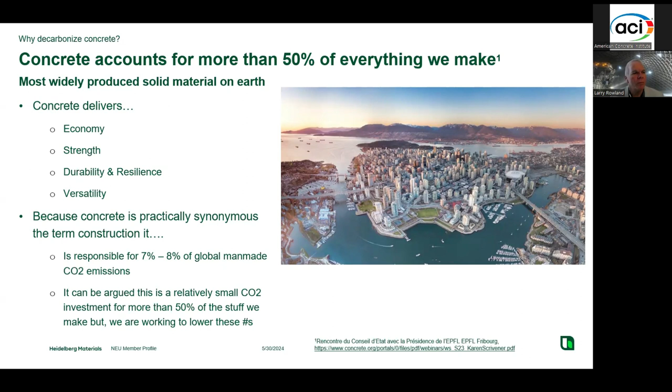Because it is the most widely used material on Earth after water, it has a significant environmental footprint. Specifically, the thing that people are focused on a great deal now is our carbon emissions. The concrete industry is responsible for 7 to 8% of all man-made CO2 emissions. That is perhaps considered a pretty good trade-off for the amount of concrete that we consume on Earth, but it is a fairly significant number. So we want to improve that and reduce it as much as we possibly can.

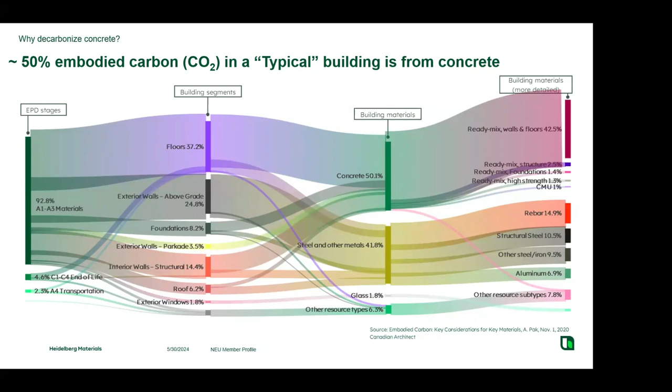Here, the concrete in this example is right about 50% of all the carbon flows, or all the embodied carbon within this building. Steel, glass, some of these other materials are there as well. But you can see the embodied carbon for a building can be quite substantial when it comes to the carbon emissions associated with concrete. And so that is very much a center focus for the design industry, for the building materials industry, and that is very much why we're taking this so seriously, and why we're working very hard to decarbonize concrete. So it's important that everybody gets on the same page of where those embodied emissions come from.

The cement binders that we use will account for 85% plus. Typically, in this example, we've got almost 88% of all the carbon emissions associated with this particular concrete mixture come from the cement binders.

The aggregate, as you see, is about 5% or less. The CO2 associated with processing, harvesting, and getting those aggregates and delivering them to your ready-mix plant are still only about 5%. Likewise, the logistics to deliver the concrete from a ready-mix plant to a project site is also typically below 5%. And then, of course, there's power, and there's other materials that we're putting in our mixes.

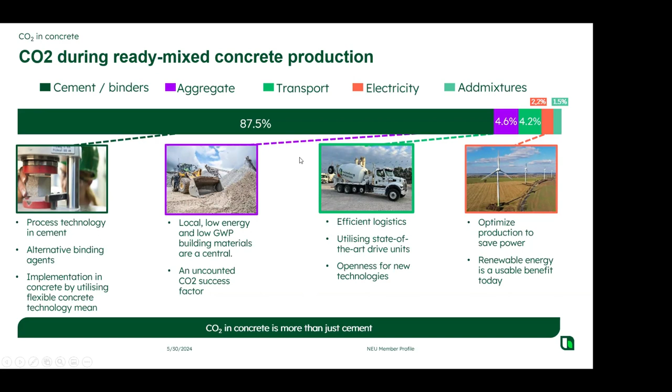So we're zeroing in on the cement, on the binders, because they play such an important role in the embodied carbon for concrete. The industry as a whole recognizes that large piece that we play in concrete.

And so the Portland Cement Association developed its roadmap to carbon neutrality. Heidelberg Materials was a part of this. We're an active industry member, and we worked together to help create this roadmap so that we can plan a way to reduce our carbon and get to carbon neutrality.

The big 5 things that we're looking at are cement clinker, the finished cement that's supplied to projects; concrete, of course, the material that everyone typically uses and associates with our industry; construction, which is certainly a big piece of how we construct our buildings, and will affect the carbon footprint for that project; and then carbonation, which is a naturally occurring uptake of carbon that concrete does all the time.

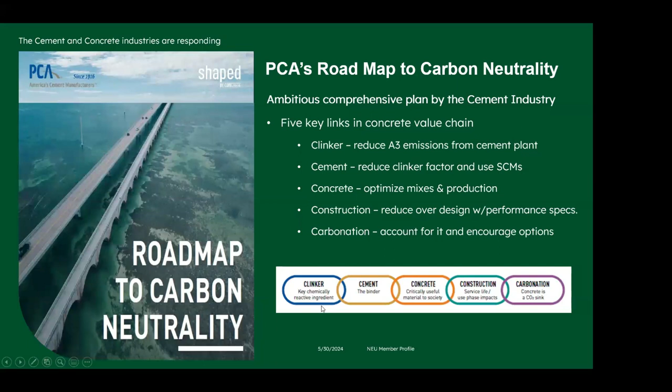Likewise, the European CEMBUREAU, which is the European Cement Association, has a very similar structure, a very similar set of goals. They actually just recently this month published their 5-year update to their carbon neutrality roadmap. They have essentially the same 5 key levers. And so you see the consistency here of everyone recognizing what it is we need to do to reduce our carbon footprint.

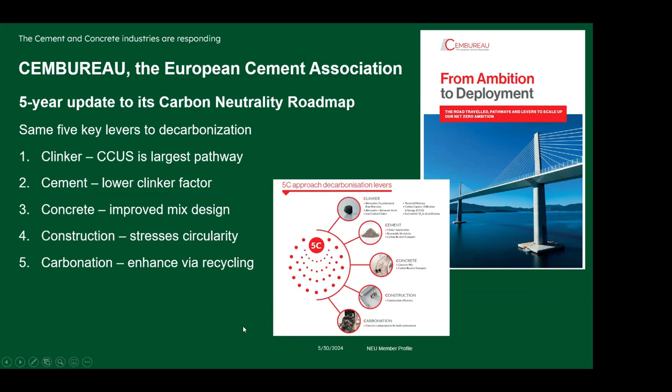With clinker, carbon capture, utilization, and storage is featured very heavily in CEMBUREAU's plans for how we're going to reduce our carbon, and the industry's approach. I'll talk about that in more detail. We also want to lower our clinker factors in cement. We want to improve our concrete mixes. Of course, we want to work with our stakeholders and our customers so that we can reduce the carbon by our construction methods, and then carbonation is a naturally occurring event, like we talked about.

So, what is it that industry is doing to respond to these plans? Well, Heidelberg Materials is active, like we talked about, in the industry.

At the cement plant, we're working hard to reduce the amount of CO2 which is embodied in our cement clinker. We do this by having very efficient cement plants. This is an example here - we just recently had a ribbon cutting at our Mitchell plant last year in Mitchell, Indiana. It's the second largest cement plant in North America, and it's super efficient. The whole goal of building this plant, and the whole goal of reinvesting in our industry, is so that we can produce our cement clinker with the least amount of fuels in the most efficient ways possible. And that, of course, equates to a reduction in our carbon.

The other thing that we do is we're reducing the amount of cement clinker that is within our cements. I'll go into that in some detail. Essentially, the idea is that we're reducing the high carbon component which goes into the cement, and that indeed will help us reduce our carbon footprint as well. I'll go into carbon capture, utilization, and storage, but it is an important part of how we're going to address the embodied carbon within cement and clinker.

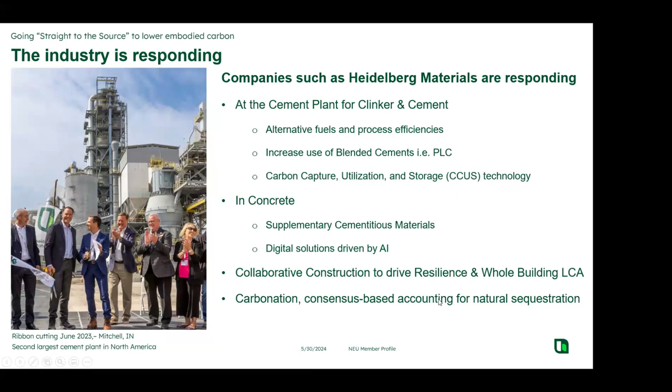And then, of course, it's very important that we collaborate with our owners. It's hard to overstate the importance of working together with all the stakeholders associated with a building project. And then natural sequestration of carbon is the carbonation piece that we keep talking about.

Heidelberg Materials is a big industrial player. We're one of the world's largest building material companies. We've got over 50,000 employees in more than 3,000 locations worldwide.

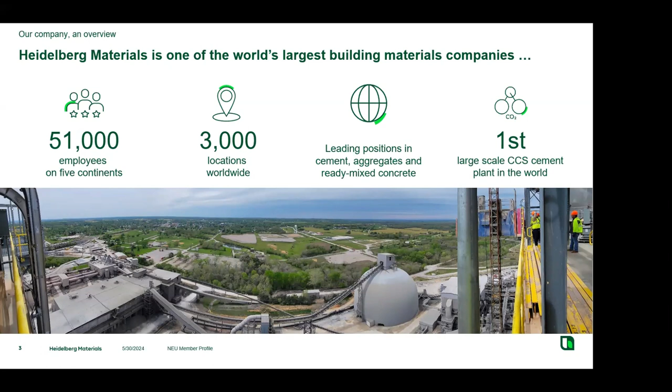And we have leading positions in cement, aggregate, and ready mix. So when we make these moves, the things that Heidelberg Materials is doing make a big difference. We're talking tens of millions of tons of savings of CO2 because of the steps that we're taking to reduce our carbon footprint.

And of course, we will be the first company to have a large-scale CCS plant in the world. In North America, we've got about 8,500 employees. I want to shout out, if there's people out there who are interested in working with a dynamic company, please come and talk to us. We've got a good place for you.

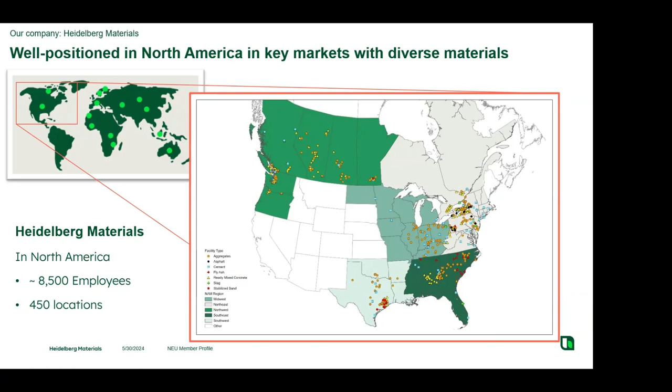When we approach sustainability, you basically have to have a plan. The old saying about how if you don't have a plan, you're planning to fail. We have great plans and we have great commitments. We have stepped up and said, look, this is how we're going to get to net zero concretes. This is how we're going to reduce our environmental footprint.

We're going to utilize an approach to reduce our carbon. That's our net zero commitment. We are going to be inclusive and safe in the way that we do our business. We value our people. As you know, people make it happen. So we value our people a great deal, and we want to enable our people to not only be safe and secure, but also empower them to help us make these changes that we need to make.

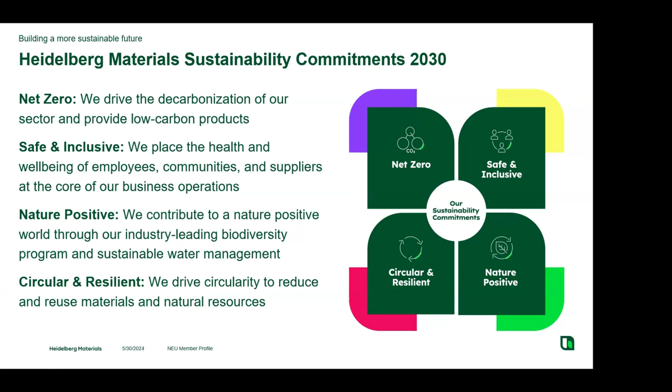Of course, we need to be nature positive, which is to contribute wherever we can and reduce our environmental impacts. And then, of course, embrace the circular economy. Think recycled materials when you see that term.

Our goals - we're an international player, as we said, and as a corporate citizen, we've embraced the approach that comes from the Science Based Targets initiative, which is essentially the group that's out there that is helping people to evaluate whether their plans are aligned with the Paris Climate Agreement to reduce global warming to 1.5 degrees Celsius. So we went to them, we've presented our plans, we've gone through and worked back and forth, and come up with the commitments that we've talked about.

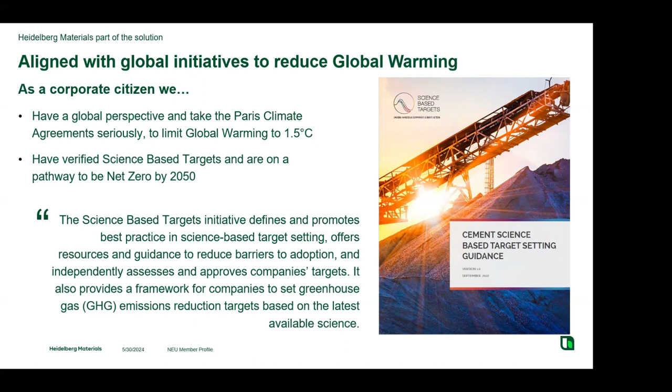And those are the world's most aggressive within our industry. This 400 kilogram of CO2 per ton of cementitious material is, like I said, the globe's most aggressive reduction in carbon for cementitious materials. For an example, so that you understand the scope of this, an industry average ton of Portland cement, according to the PCA's EPD for the industry average, is over 900 kilograms per ton. So you can see how getting down to 400 kg per ton is a big step.

We're going to have to work very hard to do that. We have to invest in alternative materials. And of course, we have to be very efficient in the way we make our cementitious materials. The other things we're going to do is we're going to reduce our overall emissions by almost 50%. You can see here we've committed to a 47% reduction in that by 2030. And all these goals are by 2030 here, 6 quick years from now. We will be producing 50% plus of all of our revenue will come from sustainable products, low carbon products.

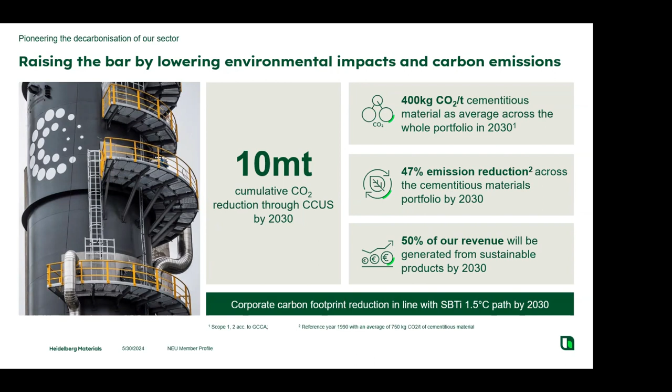Namely, these are the kind of things that we're going to be embracing within our company so that we will reduce our impacts. And then the big number here is this 10 million tons of cumulative CO2 reduction through carbon capture, utilization, and storage. And by doing these things, in a very long list, we are going to be in line, as verified by the SBTI, the Science Based Targets Initiative, to help the globe as a whole reduce global warming.

The primary technology that is matured currently, you can see we've got a green bar for maturity here for the amine carbon capture and storage technology. This utilizes an amine solution which helps us capture the CO2. I'll go into some detail on that.

And of course we're exploring and investing in multiple other types of carbon capture and storage. We need to find the most efficient, the least amount of energy use, the most cost-efficient ways of capturing carbon so that we can really help decarbonize our industry and help revolutionize the way that this industry manufactures cement and binders for concrete.

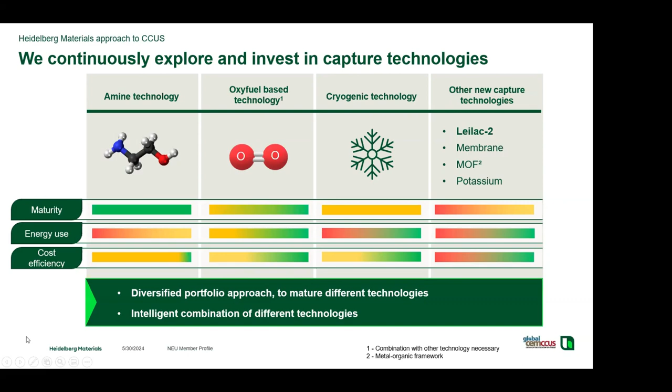And we have oxy fuel-based projects underway, and of course we're also doing Leilac-2 projects. So we're across the board building and working at different technologies to find the very best ones that are going to help us sequester that 10 million tons.

The very first, most mature technology now is the amine technology we talked about. That's underway for Brevik, Norway. In Brevik, it will be the very first industrial scale carbon capture and storage plant on Earth. We're very proud of that plant. Like we said, that'll be operational by the end of this year.

Once the plant is operating at full capacity, it will be capturing 400,000 tons per year of CO2. So every year, the capacity for this plant in Norway is 800,000 tons plus or minus, and about half of all its emissions, 400,000 tons a year, will be captured through this process.

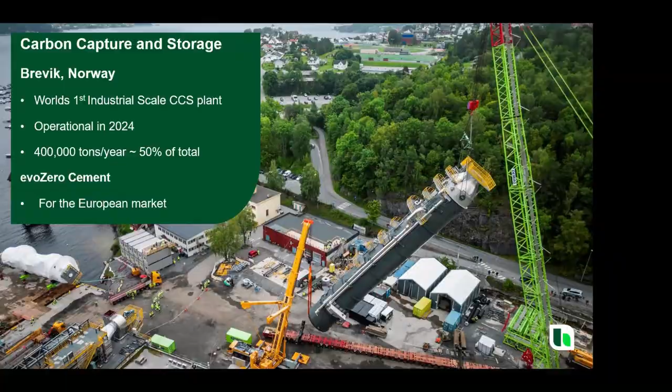This makes possible the sale of EvoZero cement, which is available in the European market a couple different ways. Basically, it's the very first net zero cement that's available without buying something out of our value stream, some offsets or something like that. We're doing a mass balance approach.

In other words, since we're capturing roughly half of our emissions, we could only sell that many, right? We can't sell a full 800,000. We can only apply and work with our customers to claim EvoZero on the portion that is associated with that CO2 capture and storage.

A very rigorous accounting process, and it's all very much transparent. Everybody can see exactly how that works. It is, like we talked about, the first site here on Earth, and we're working very hard with our customers to make this material available, and of course to use book and claim technology and a very transparent process so that EvoZero is available to our customers.

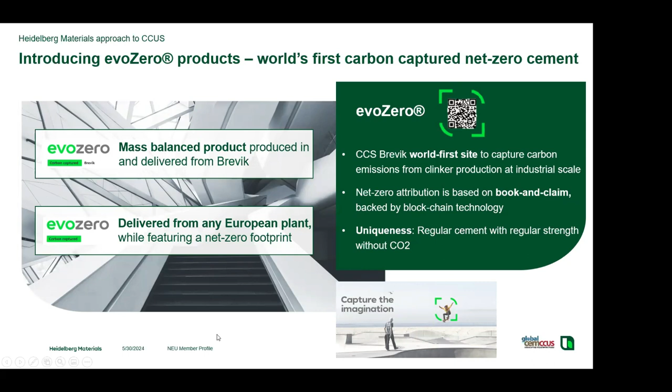The very next big project, which is also an amine system, is going to be in Edmonton, Canada. This is in Alberta, north of Calgary a ways, a few hours north of Calgary. This is going to be the first full scale. As we talked about, Brevik is roughly half of their production of CO2 generated associated with their cement production. Essentially all of the cement production CO2 in Edmonton, Canada will be captured and stored in that process.

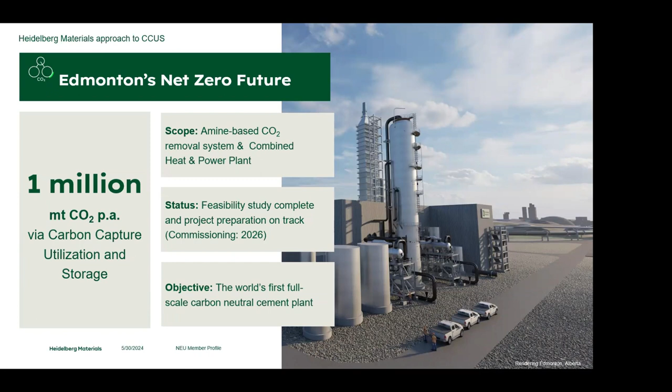So the cement that is sold will be the same. We want to start with the very lowest carbon cement as we can, and we want to sell that to our customers. We're doing that currently. Our customers, when they're buying this cement in Edmonton, won't see any difference in the cement. All the activity associated with carbon capture and storage happens at the stack, essentially where we would release CO2 as part of our gas emissions for the plant.

That material, all of those emissions, will be diverted, and the CO2 is separated from the gas stream from our exhaust stack. That CO2 is then run through an absorber. The CO2 is taken out of that gas stream and captured. It's separated with an amine solution.

It is then circulated into a second chamber where the CO2 is desorbed, or stripped off the amine. We have to apply a good deal of heat to make that happen. Then we have pure CO2, which can be injected and stored in the ground.

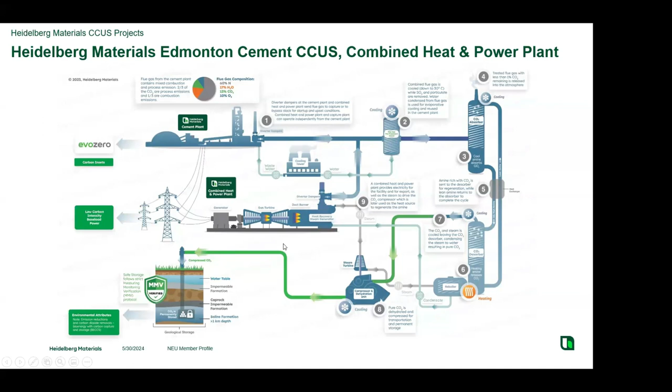An important thing to understand is that the exhaust from this, the CO2 generated from this combined heat and power plant, is also captured and run through the system. So any CO2 that's generated from that becomes part of the overall capture strategy.

So when we talk about net zero cements, and the way that the accounting happens, everything has to be very transparent. So we have to work with life cycle assessment experts and professionals to make sure that our accounting is done exactly above board and with transparency.

Carbon capture, utilization, and storage picks up the biggest piece, which is bringing those numbers down. And then, of course, the net impact is we're going to get down at zero, below zero, or very near zero, which is our goal, right? This is where we get to start.

Then, of course, ready mix, or any concrete producer that buys that cement, would take that cement that has essentially zero or even below zero embodied CO2, apply it, and be able to get to where they have a net zero concrete.

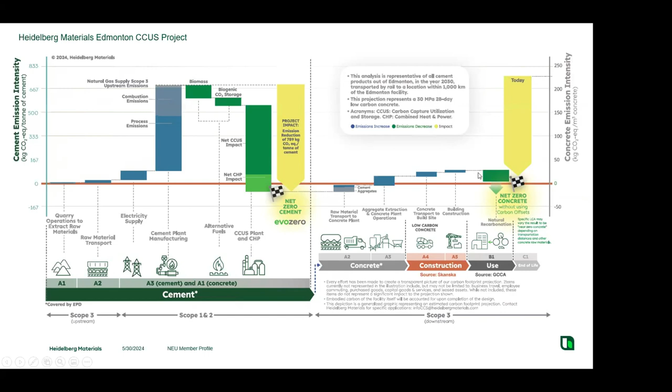Today, those concretes are up around 225 kilograms per meter in Canada. And then, of course, in the United States, we calculate it by kilograms per yard or pounds per yard. But either way, the point is that because you're starting off so very low, it's very easy to keep those numbers very, very low and or even get down to net zero.

Okay, so I know that's a whole lot of detail, but the question that always comes out of this is typically, what happens with the carbon capture and the CO2, how is it stored? Well, an important key feature of this process is that the CO2 is stored with a measured, monitored, and verified storage approach. This is all highly regulated by the province of Alberta, and it is verified and monitored to the point where we know exactly what's happening with that CO2.

The CO2 is injected down into the ground about 2.5 kilometers in our case, and that material has to be in a very specific aquifer that will accept the CO2. We also have to have layers of cap rock in place. In other words, we have to make sure that these geological deposits will accept the CO2.

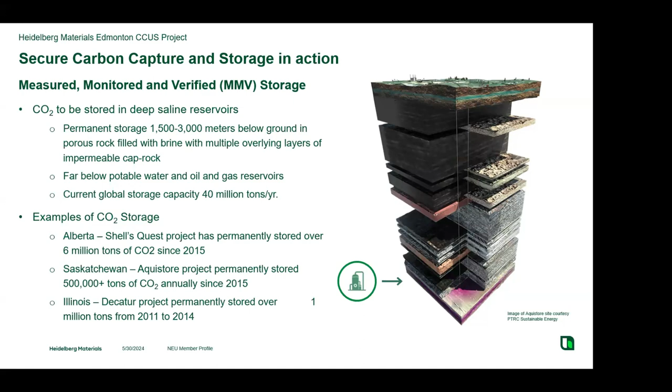The CO2 will be there as permanent storage, and we don't have to worry about that material coming back up. That's where the monitoring and measuring comes in. We're going to measure the CO2 as we put it in the ground, and we're going to monitor it to make sure that we're not losing any pressure, or that the material is being absorbed into that saline aquifer and mineralized, etc. And so the material will be stored essentially permanently.

The next big project that we're looking to do here in North America is to apply carbon capture, utilization, and storage to our plant in Mitchell, Indiana. The plant I talked about as being this very efficient new plant that we built in Mitchell.

We've already received a very generous grant from the DOE to pursue this technology so that we can do carbon capture and storage in the Mitchell plant in Indiana. You can see here the plant, we're looking at a couple million tons per year of storage there. It's a larger plant, it's more efficient already, and we're going to go ahead and capture essentially all the emissions that we can in Mitchell. The goal is to get very near 100% of those emissions.

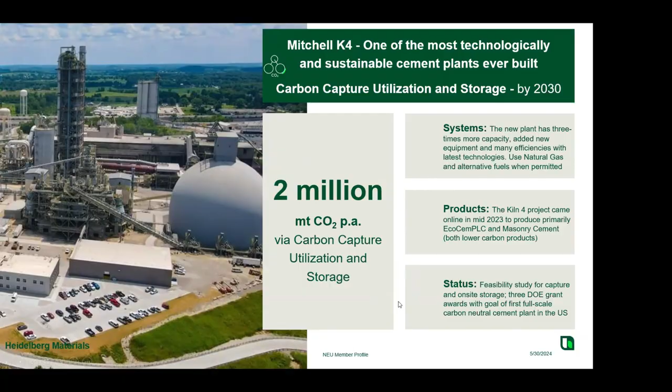To make this happen, and the thing that's going to enable the industry to embrace this technology, of course, is to build these plants, to learn how to do them effectively, to learn how to do them cost effectively, and certainly gain efficiency associated with capturing the CO2.

We need to have those class 6 wells, which are the right geological formations, like I talked about. We have to make sure that infrastructure of the pipelines and the wells themselves are in place so that when we capture the CO2, when we capture this carbon emissions, that we have a place to put it and that there's infrastructure to accept it.

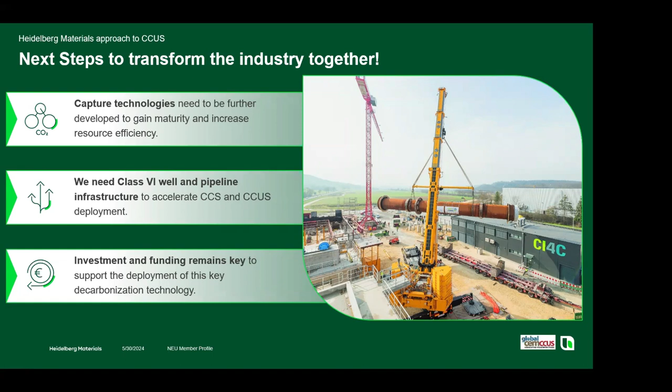And then, of course, it takes a significant investment to do these projects. So cement is not the only thing and the only approach. It is a big focus, like we talked about, because of the proportional embodied carbon associated with it.

You can see here under our cement, we've got the evoZero, which is the cement associated with that carbon capture and storage. But of course, we also have our EcoCem PLC and our EcoCem Plus cements. So these are reduced low carbon cements. We have EvoBuild concrete, which is a low carbon concrete. We then extend that out into our aggregates and asphalt as well.

Since concrete is the material that most people are buying, these concretes are perhaps the things that you'll see out in the market right away. And the EcoCem Plus or the EcoCem PLC enable the EvoBuild concretes.

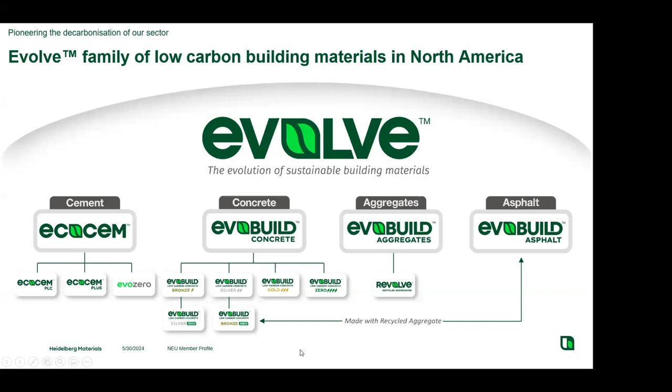So when we talk about having low carbon cements, we want to talk about clinker factors. I mentioned clinker several times. Clinker is the material that we manufacture in our kilns. It's the material that the cement factory essentially makes. The big energy and the big CO2 emissions come from manufacturing clinker.

Portland cement has a clinker factor of 94, 95%. Portland limestone cement has a reduction of about 10% below that. This is a 12% reduction in this example here. So EcoCem PLC will have up to 15% limestone, which helps us reduce our clinker factor.

And then blended cements, which have not only limestone but also, in most cases, a supplementary cementitious material such as slag or ash or some of these other materials incorporated in that, we're going to get this clinker factor down much further. We have slag cements where that clinker factor is down well below around 50%, or a little bit below 50%. So these are innovations that we're able to use.

These cements are all manufactured per specification. They are very much structural. They're used every day. They're products that you're used to here in North America. There's been a great deal of push to bring Portland limestone cements to market, so they're the kind of things that you're already seeing out there.

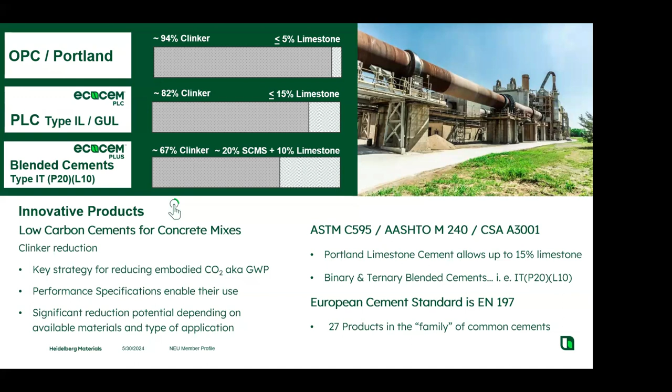I talked a little bit about our carbon footprint for cement. It's important that people understand that two-thirds of our CO2 emissions, our carbon emissions associated with manufacturing clinker, come from heating up the limestone. It's a natural process. When you apply heat to calcium carbonate, which is another name for limestone, you generate calcium oxides and CO2. The calcium oxides are bound up with silica compounds in most cases, and that's essentially what we're capturing to make our clinker. The CO2 is a byproduct from that process. Two-thirds of our emissions come from these process emissions, and that is something that we really can't change.

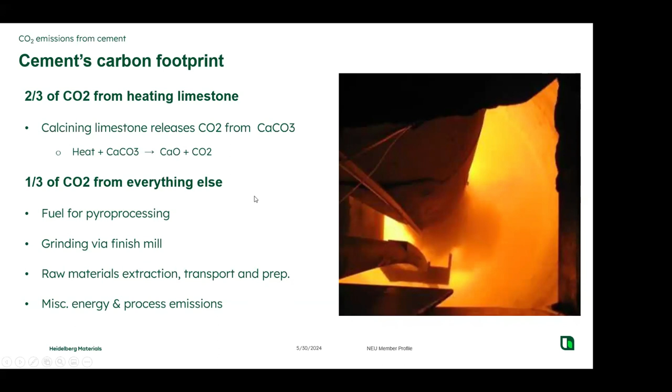Our one-third is where the efficiencies come in. This is where alternative fuels, grinding efficiency, burning efficiencies, and utilizing the right raw materials, et cetera, all help us reduce that piece of our emissions.

So kind of as a review here, when you're looking at generating or producing these low carbon concretes or these low carbon cements for your low carbon concrete mixes, we are very much doing a lot of trials to make sure that the product is ready for market.

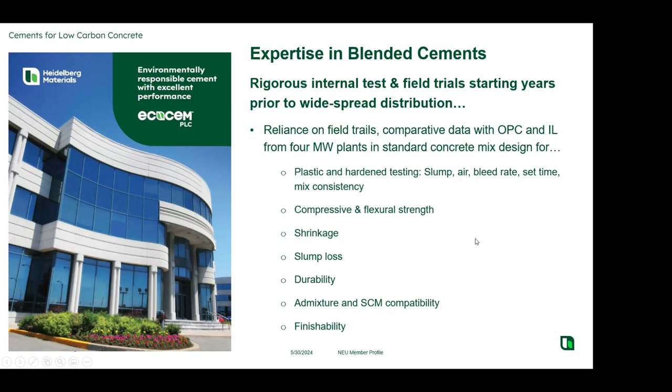We've gone through, and you can see for the example that we use for our type IL or Portland limestone cements, this is the kind of testing that we've done here in the years leading up to selling Portland limestone cements throughout the Midwest. We were able to verify and make sure that our cements would do the job that you expect them to do.

Another neat product, and it's a little bit of a specialty thing here, is our TX Active product. This is a photocatalytic cement.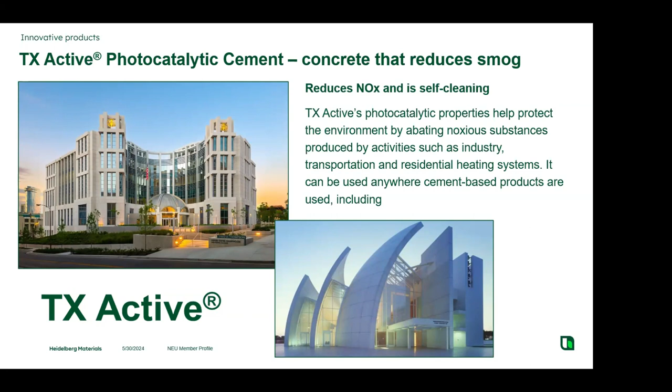The amazing thing about this cement is it actually is like they sometimes call it a smog eating cement, because it will actually mitigate NOx. It will pull NOx right out of the air through a photocatalytic reaction on the surface of the concrete. And through that process, it has what they call the Lotus effect. So it is not only cleaning the air and scrubbing the smog generating NOx, but it's also self-cleaning. The concrete itself actually removes the soot and soiling that can accompany the surface of concrete.

So getting back to concrete, in our low carbon concrete, the keys to a successful low carbon concrete mix are to choose the right cements, like we talked about. Utilize a low clinker content in your cement. Make sure that the clinker is made very efficiently. Optimize your aggregate gradations, like we talked about, and dial in your mixes so that they're very efficient. Utilize AI tools, and then of course work together with the project stakeholders.

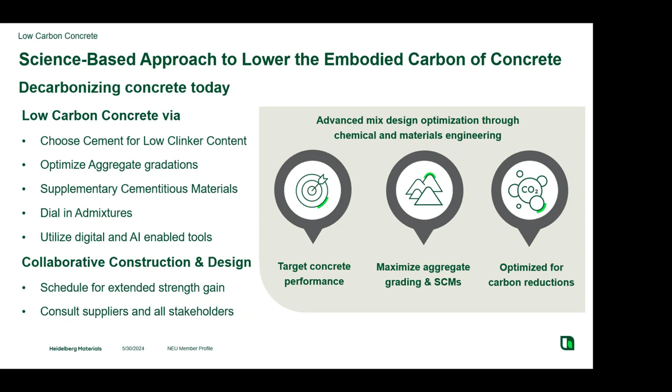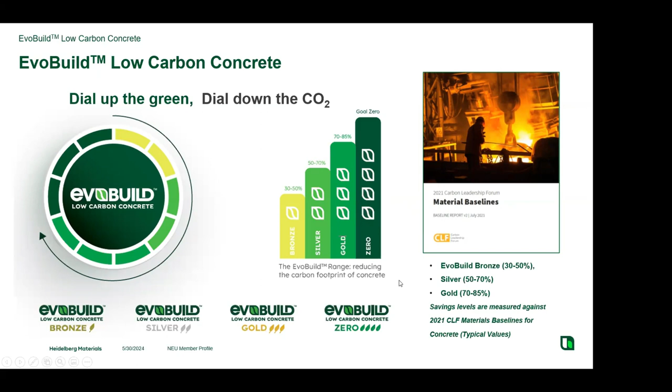I talked about this a little bit earlier. EvoBuild is Heidelberg Materials' low carbon concrete brand. It's set up pretty straightforward. If you order EvoBuild bronze, you're going to get concrete that has a 30 to 50% reduction in CO2 versus a standard baseline. That baseline was set by the 2021 Carbon Leadership Forum baselines, which the NRMCA has embraced. EvoBuild silver will be a 50 to 70% reduction, and then gold is 70 plus.

So what those numbers mean when you start actually cranking the numbers and looking at the evaluation, it's pretty straightforward. We take the benchmark, which are listed here inside this box. You can see for a 3000 PSI mix, the benchmark GWP, or the benchmark embodied carbon for that mix, is 291. We reduce that by 30 to 50% to sell a bronze product. Therefore, our global warming potential for these mixes will have to be below 204 down to 145 -- 203.7 to 145.5, etc. So it's very straightforward.

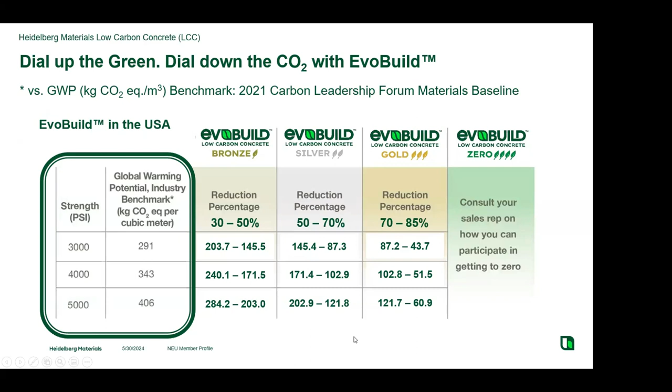It's very beneficial. The neat thing about this is we can show it on our EPDs. You can see very clearly what the GWP associated with our mixes are, and you'll see just by the name of what we're selling you that material is going to be a low carbon concrete.

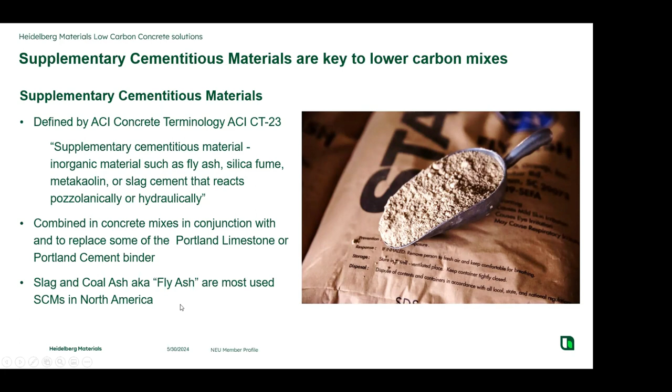To get there and make these mixes low carbon, we're going to utilize supplementary cementitious materials to a great degree. As ACI defines these materials, they're essentially something that reacts pozzolanically or hydraulically within the mix. They will almost always react with calcium hydroxide, which is a hydration product from within the Portland cement system. They'll be combined in there, and we will reduce our Portland limestone cement or our Portland cement binders by replacing them with these supplementary cementitious materials. Most of the time here in the United States or in North America as a whole, these supplementary cementitious materials would be fly ash or slag.

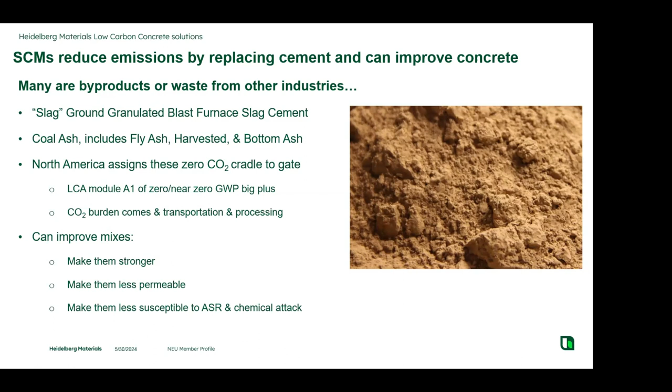Like we talked about, ground slag, or ground granulated blast furnace slag cement for short, or just plain slag, is a really terrific material because you can get very high replacements of that material into your mix. Coal ash, often referred to as fly ash, and we're reclaiming those materials now -- that is also very beneficial and a very widely used SCM. In North America, these are essentially considered to start from where they are produced at having essentially zero embodied CO2, because they are waste products from other industries. So that makes the global warming potential associated with these materials very low. The embodied carbon in these materials is very low. It helps us reduce our carbon footprint for our mixes. And the neat thing about them is they improve our mixes -- they improve concrete mixes, can make them stronger, less permeable, less susceptible to chemical attacks and ASR and those kind of things.

So the ins and outs of these two important products are, for instance, with slag: slag is a waste product from the blast furnaces, like we talked about. You can see the different materials being tapped off from a blast furnace. The slag material needs to be quenched. It's a byproduct from that iron processing in the blast furnace. It has all the right chemistry, but if it's air cooled, slag becomes inert -- it's essentially just a stone or something that is often landfilled because it has very little value in the market. It's just a porous rock. Well, if we are quenching these and we install a granulator in some of these blast furnace operations, that then becomes these valuable slag cement materials.

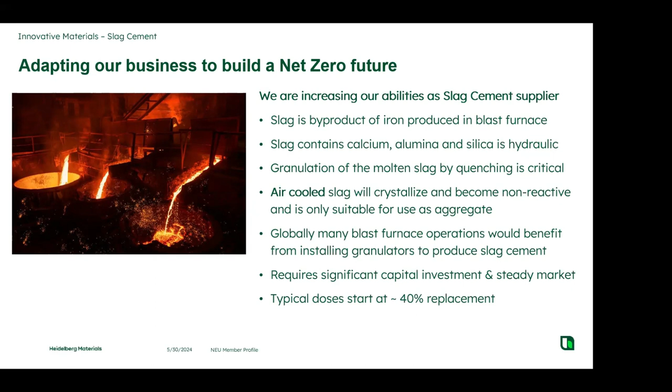That's the key to making slag reactive: installing a granulator to convert this material into a cement-like material. We're working very hard to access all the blast furnaces in North America and make sure granulators are installed in those operations, so that slag cement can be produced instead of something that would otherwise just be wasted.

In fly ash, people are very familiar with it in most markets. Fly ash, or coal ash, is a coal residual from burning coal at a power plant. These coal ashes have been utilized for many years, but historically there was much more fly ash generated than the market could consume, so these materials were landfilled.

That represents a really good resource now, because as these coal burning plants convert to different types of fuels—for instance, an electrical power plant converting from coal to gas—the fly ash goes away. So they have over 1 billion plus tons of landfilled coal ash in place now in North America. That represents a resource to us if we use the right technologies to beneficiate that ash and make it useful in concrete.

Fortunately, we acquired the SEFA Group last year, which has 47 years of experience in marketing and selling ash. They have the STAR technology, which enables us to go into a landfill and beneficiate that ash, thermally process it, and that ash then becomes very consistent and a very good SCM for concrete. We have at least 40 plus years of resources out there in landfilled ashes that we'll be able to tap into.

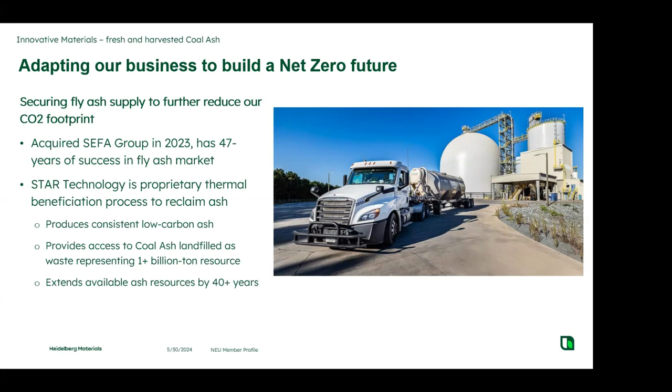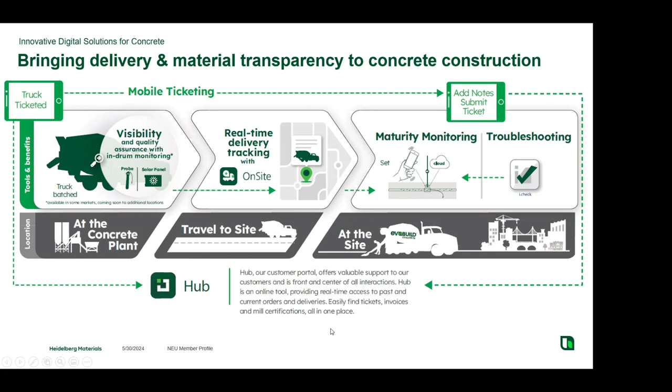And finally, I promised I'd talk a little bit about digital technologies and how that helps us be sustainable. We're embracing this in a very big way. Our ready mix operations have in-drum monitoring—we know what that concrete is, where it is, and what it's like, and we're able to track that material all the way to the project site. We're also embracing maturity monitoring, which helps the designer have faith in understanding what's happening in the mix.

In these truck monitorings, essentially it's a probe that mounts into the side of the drum and tells us exactly what's happening. We know how the mix is batched, and the probe will tell us what the slump is. We can make adjustments at the plant, so people aren't tempted to get to the job site and add a bunch of water. So the concrete gets better as far as our quality control.

And of course, we have the monitoring—all the data we're collecting will help us make good decisions in the future as well. It also helps the customer because they get to see exactly where that truck is, et cetera.

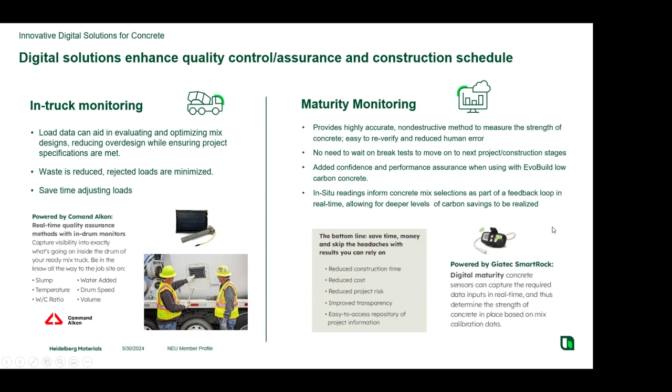Maturity monitoring is basically running a strength gain curve, so you know exactly when the concrete is getting to the specified strength. You don't have to wait to break cylinders that may have ended up getting left out in the elements, or not picked up correctly or managed properly. Instead, you can utilize maturity monitoring with these in-place probes—you have an app on your phone that tells you exactly how strong that concrete is. So if you're waiting to strip a column until you get to a certain strength, you know exactly where that is.

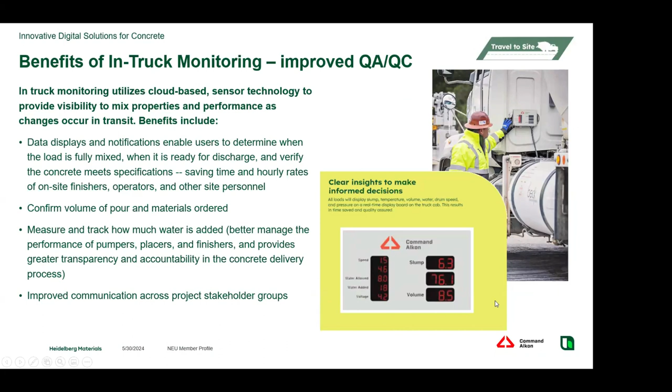So between these two things—the in-truck monitoring through our probes and the maturity monitoring, which is all enabled through the web and cloud-based technologies—we're able to monitor our concrete and understand it all the better.

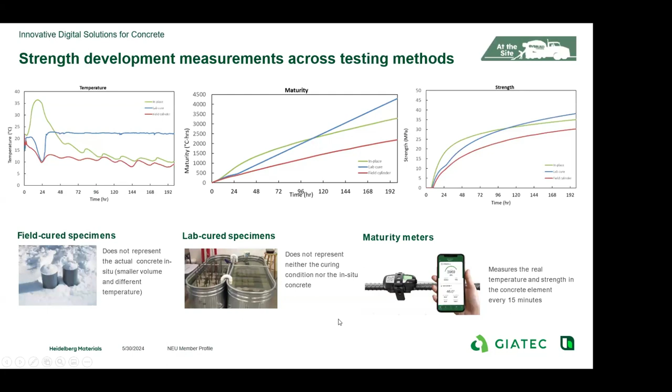And that is what really drives change for our customers, owners and specifiers, because it gives them confidence. They're able to utilize specifications that are looking for performance, and they tell us what it is that they need, when, and we can give them the right mixes with a very low embodied carbon associated with those mixes. The performance specifications enable a tremendous amount of innovation by the concrete producer.

The other thing we'll do, as we talked about, is continue on this path of having lower clinker contents in our cements.

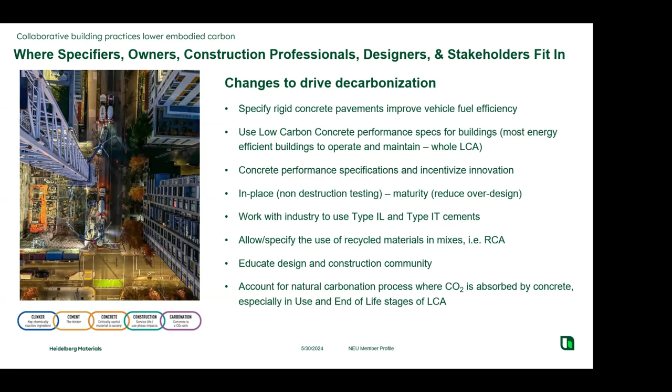We need to work with our customers to make sure they're on board with that and that everybody understands the impacts to the schedule and what we can do to make adjustments. We won't necessarily have the same global warming potential for each mix. So work with the customers, make sure everybody understands the targets, and we're able to make some great inroads and reductions in our carbon footprints.